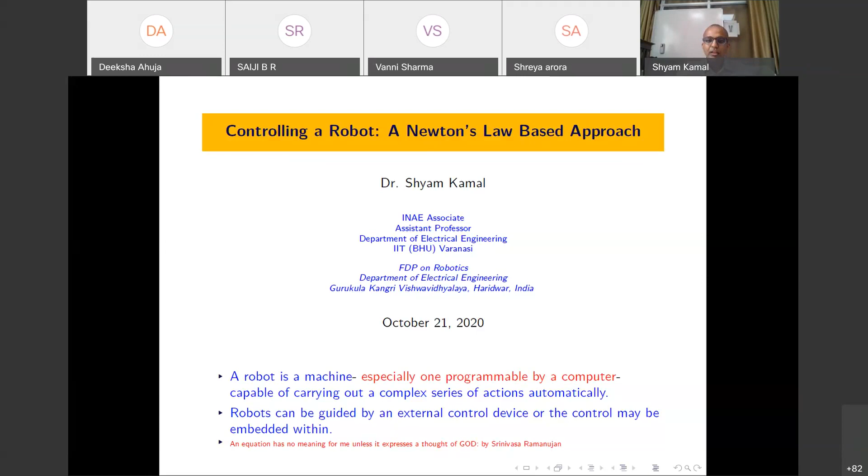So within these 2 months, I tried to understand the control system again from the fundamental point of view, and I found that it is possible to teach control system using Newton's law. So the same kind of thing I am going to share today. So let us start the discussion. Basically, the purpose of today's discussion is to introduce the audience to the latest effective and easily applicable method of control of robotic systems. Because, as I told you, using Newton's law I taught them nonlinear control techniques also. So using Newton's law, you are able to understand linear, simple control systems as well as the highest form of control system.

And heavy uncertainty condition means that, suppose your vehicle is moving in the open ground and some storm is going to hit it, we do not know the magnitude of the air which is going to disturb our system. And whenever this kind of unexpected thing happens, that is termed uncertainty. And there are several forms of uncertainty. One is called external uncertainty; another uncertainty arises due to measurement.

So whenever we are making some system, we assume that we know each and every parameter. Suppose you want to apply Newton's law, then we assume that the information of mass is available. But you are all aware that I cannot measure the mass exactly. There always exists some kind of error. And the control system should be beautiful enough that even if I have approximate information, I am able to fulfill the task precisely. So that is the aim of control system.

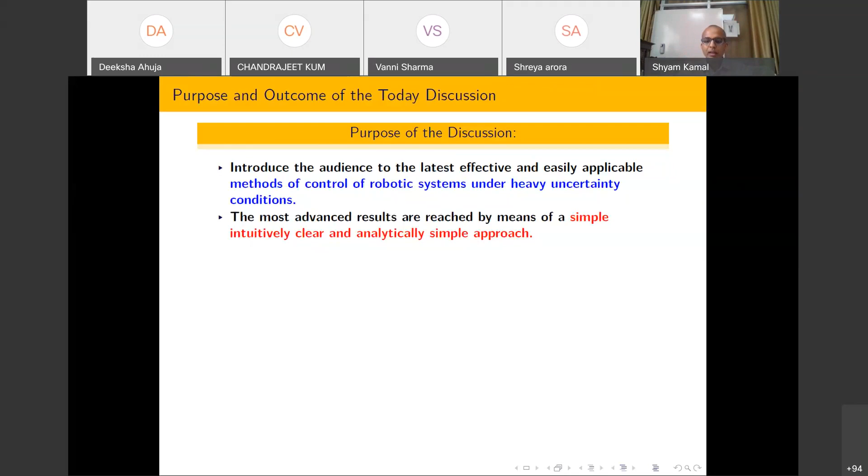So this is the story about the system. It means that any robotic system is nothing but some kind of mathematical function which will take input and give out some kind of output. And after that, after completion of this discussion, we are at the end of the lecture. The audience will be able to understand the physical interpretation of a term called PID. I will explain this term in the next part of the lecture. For the time being, PID means P for proportional, I for integral, and D for derivative.

Again, come to Newtonian calculus. In calculus we have two operators: one is the differential operator and one is the integral operator. And obviously we know the meaning of proportional. So basically using these three operators, Newton tried to capture some kind of things, and we are going to see what Newton was trying to capture using these three operators. And after that, if you learn this lecture carefully, you will be able to design control systems for the following class of systems: electrical motor design, because the motor is an integral part of any robot. Most robots are based on the electrical motor. So you have to understand how to control the motor.

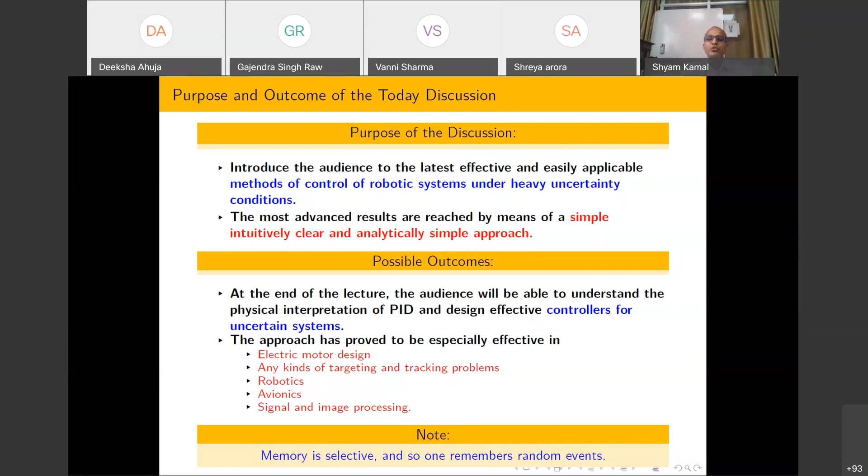So let us start the lecture. And I have already told you that one of the integral parts of this lecture is Newton's law. So first I am going to again review Newton's law. I hope that everyone is already well aware what is the meaning of Newton's law.

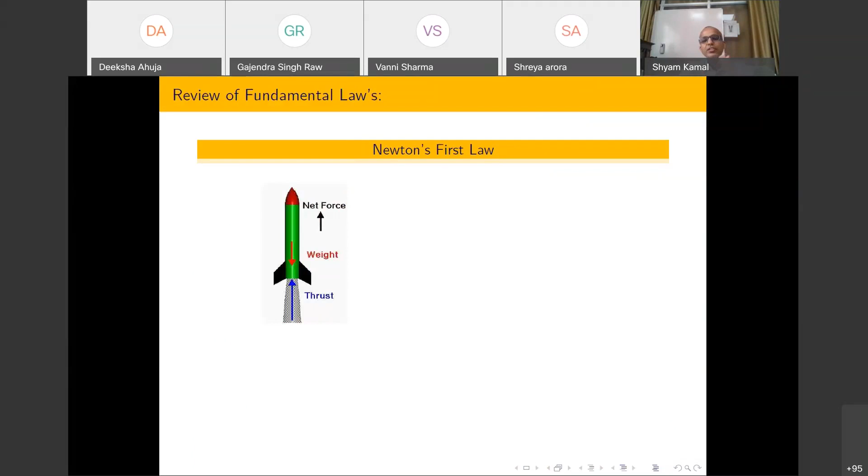So in order to explain Newton's law, I have just taken one system, and that is from aerospace. So this is a rocket, and you all are already well aware of how basically a rocket is working. So before going to the working principle of the rocket, first try to understand the statement of Newton's first law.

So what Newton has suggested is that every object persists in its state of rest or uniform motion in a straight line unless it is compelled to change that state by forces impressed on it. It means that if external force equals 0, if some system is at rest, then it remains at rest. If it is moving with some constant velocity, it will keep moving with constant velocity.

So you can see that I have first developed this kind of rocket, and after that I am going to see the situation before firing. Actually, whenever we are making a rocket, we are putting some kind of fuel inside the rocket. Firing means somehow we are going to burn the fuel. So before firing, what happens? This object is at rest and air speed equals 0.

Now, when we fire the engine, it means that somehow I am burning the fuel. So what happens is that when the magnitude of fuel decreases, some kind of thrust is going to increase. So that thrust is basically created due to the burning of the fuel.

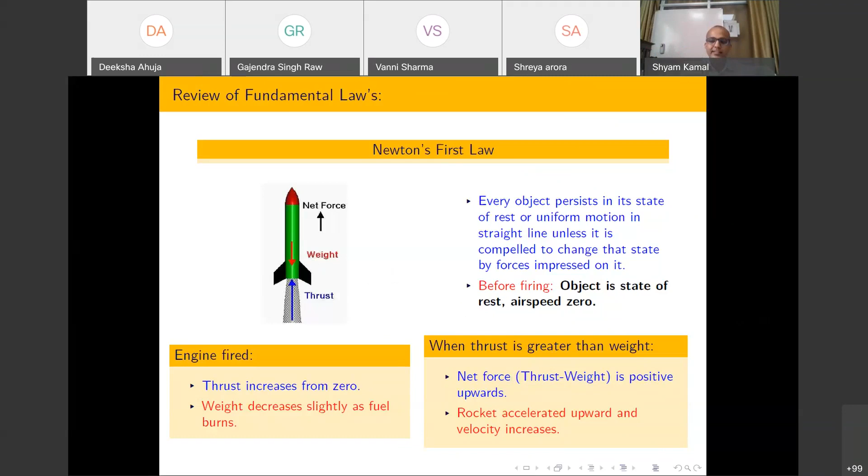And before proposing the second law, what he has observed is that whenever some force is going to act on the system, the position is going to change, and that rate of change of position he defined as velocity, and rate of change of velocity he defined as acceleration. So that is the meaning of acceleration. You all are well aware.

So now let us try to see the second law, and he defined the second law as: force is exactly equal to the rate of change of momentum. It means change of momentum with change of time.

And during school time we are reading this definition, but whenever we go to a higher class, at that time we are talking about instantaneous rate of change basically, because we know the concept of limit and these kinds of things. So for the time being, you can just assume that force equals change of momentum with change of time.

I found that most of the time whenever students come to the university, and if you ask them what is Newton's second law, they say F equals ma. That is wrong. That is not correct. That is just one special case of this particular definition. And let us try to see that.

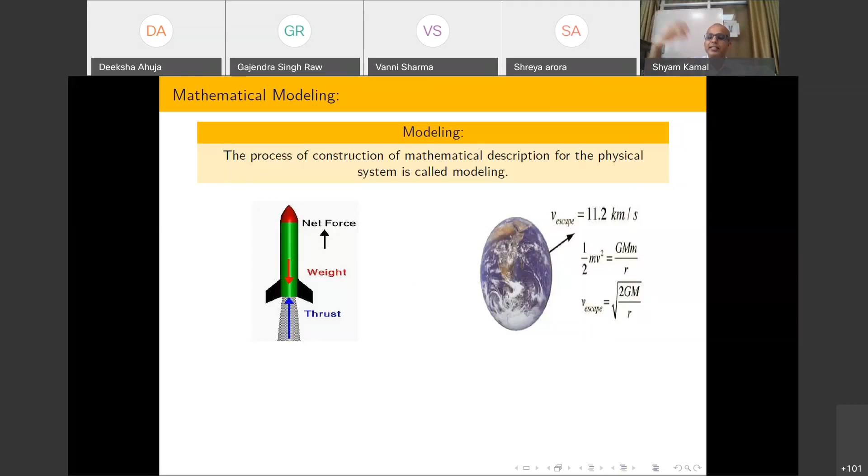And I am going to take help of this during the mathematical representation of this particular rocket. So you can see that now I have no physical rocket, but I want to do a study about the rocket, so mathematics is going to help us, and basically calculus is enough most of the time.

So what I am telling, h(t) is height. I am assuming this rocket is initially moving in a straight line, so only change occurs in this direction, that is the y direction, and I am assuming that is h(t). And rate of change of position, so somehow position is changing, I am assuming that just this height is going to change, so rate of change of height equals velocity.

After that I have to use Newton's second law, that rate of change of momentum. So how to define momentum? At a particular time, momentum is mass multiplied by velocity, and their rate of change is d by dt. Whenever I write this symbol, its meaning is d by dt. So in short, people write dh by dt equal to h dot, that is one convention to write.

Now you can see that rate of change of momentum equals force, and only one force is acting on this system, and that is gravity. So I am assuming that initially when this rocket starts, the rate of change of momentum is exactly equal to whatever force acts on this system.

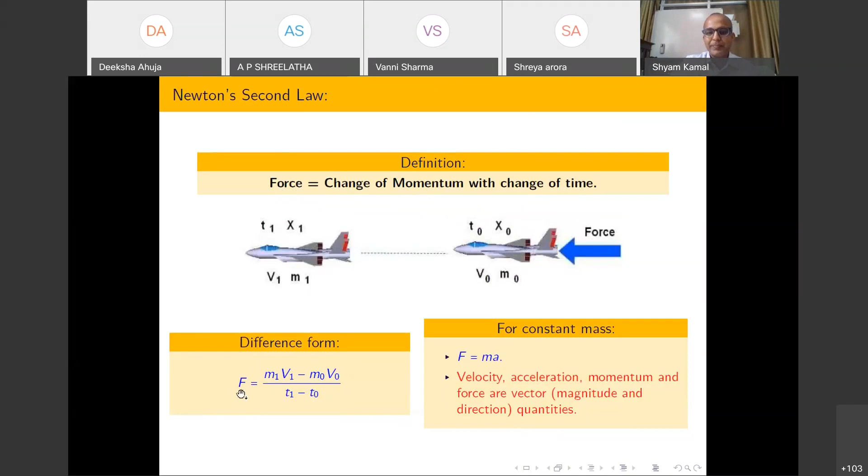That I understood, sir, that I understood. Okay, so if you have no confusion, then I will go to the next part of this lecture.

So now here you can see I have done one modification. What kind of modification have I done? I have replaced this velocity v by some kind of escape velocity. And why are we doing that? Because somehow I want to make some kind of rocket such that it will escape from the atmosphere of Earth.

And I have defined m dot, meaning rate of change of mass of this rocket, because most of the time if you see the rocket, a lot of its mass is just fuel. So we are assuming that whatever rate of change of mass comes into picture, that is just due to burning of fuel, and that is the control input for us.

So here, how basically do we control the rocket? We are burning the fuel, and that fuel creates some kind of thrust, and after that basically we are moving from one point to another point.

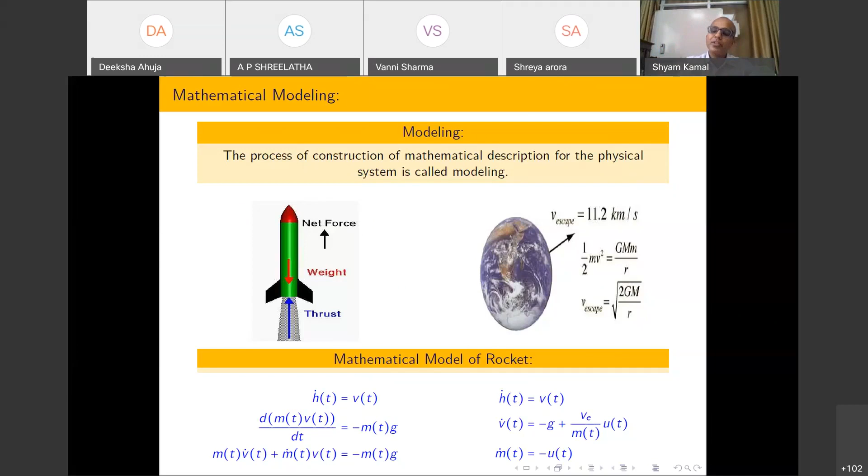Okay, so let's leave that. Now let us come to the second part of robotics, that is underwater vehicles. This is also one of the very important classes of robots.

When I joined here, a student came with this particular setup. In IIT BHU, they have this kind of setup. Now they want to control, or move this underwater vehicle inside the Ganga. Their main motive was to analyze the pollution, so they put some kind of sensor which can measure the pollution level of the Ganga, and they had to move this underwater vehicle from one point to another with some constant velocity. That was their aim.

But what happens is that they are unable to move with constant velocity, because the river is always flowing and its velocity of flow is not uniform. If you just record the velocity of flow within 1 to 2 hours, you are able to see the variation. So it is very difficult to move this underwater vehicle with constant velocity from one point to another point.

Now I am going to tell you another story. In a previous class, I talked about mathematical modeling. What basically mathematical modeling is doing: I have some kind of input, I have a certain kind of output, and they are defining some kind of virtual system in between using mathematics, such that if I apply input, I will get output. I have already told you that this virtual system is nothing but some kind of function—all machines should be some kind of function.

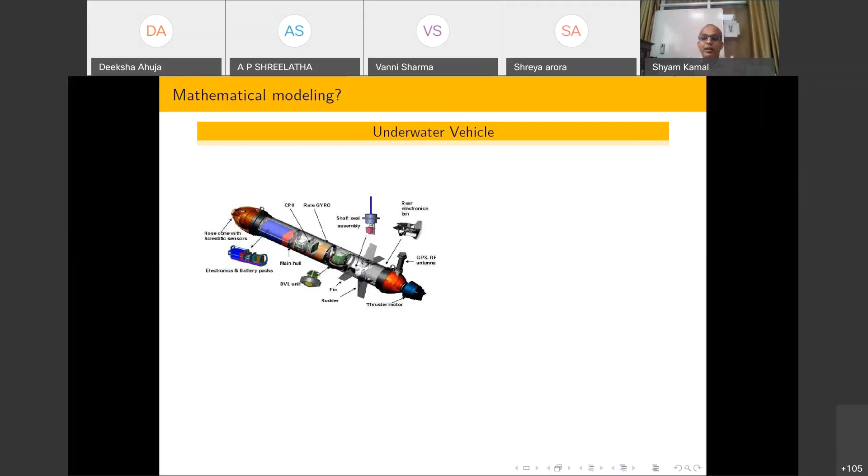It might be possible, if we are more curious, that I want some kind of velocity that is changing with respect to time, that is called time varying velocity. So based on that aim, you have to do the modeling. So you have to forget everything, and just now you have to control the motion. And how to control the motion? Again, Newton's law comes into the picture, and you have to just apply the second law, F equal to ma.

So here, for simplicity, I am assuming the mass of this underwater vehicle is unity, but you can scale it out. You can take any value of mass, that doesn't matter. And you multiply mass and rate of change; v dot is dv by dt, that is acceleration. So this is just a symbol used in engineering literature, control literature particularly. So whenever I am writing v dot, I am talking about the rate of change of velocity with respect to time.

So mass multiplied by rate of change of velocity. Now F, this is ma. Because I am assuming that the mass of this underwater vehicle is fixed, due to that reason I am going to use F equal to ma. Otherwise I have to go via the rate of change of momentum. So what I am going to do here is fix mass equal to 1, just for simplification. So I have m v dot, and this is u, and I have put one dash here.

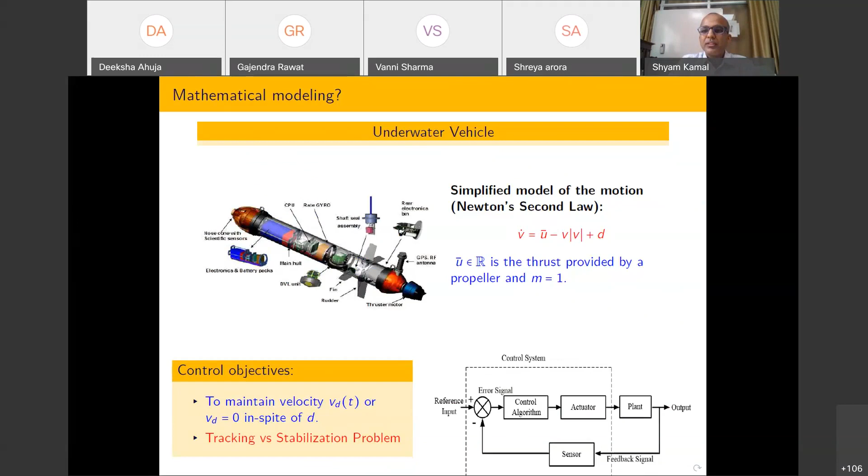Before, hello. Hello. Okay. Now my voice is clear. Yes, sir. Okay. So now I think that I am audible. Sir, you are audible. But actually our host is telling I am audible. So it might be possible. Please check your connection. Sir, you are properly audible. Audible, sir. Oh, okay. Okay.

So please come to the next part of this lecture. Here you can see that I have talked about two problems: I have to stop some vehicle, or I have to move with a certain speed. Both problems are not different; they are equivalent, provided we can assume something. And this slide conveys the same thing. Suppose you have to track this velocity Vd. This is my reference velocity, and whatever velocity I have now is called v. I am moving the underwater vehicle, some velocity is created, but I have to track Vd.

Suppose this Vd is some kind of sinusoid, meaning I have to move that underwater vehicle along some sinusoidal path. You can create a circular path, whatever path you want. But there is some limitation. What kind of limitation? Whatever path or reference you select should be differentiable. Otherwise, I cannot apply Newton's law, because here v is changing with respect to time, and due to that reason the error is also changing with respect to time.

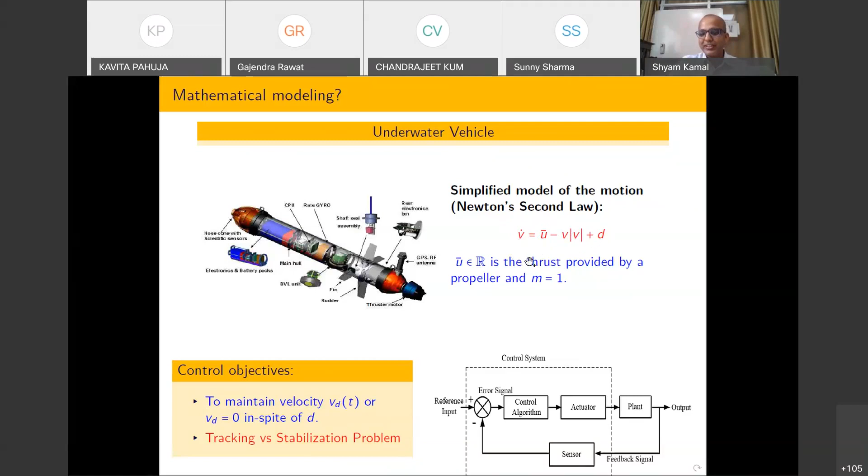So why are we doing mathematical modeling? Now you are able to understand. Using the mathematical model, I can talk about the control action. So basically, whenever v dot comes into picture, I can automatically substitute the right hand side, and after that I have vd dot. Now what is our aim? Our aim here is to make error equal to 0. If error equals 0, then v equals vd, and that is our aim.

Whatever velocity is coming from the underwater vehicle should be exactly equal to our reference velocity. That is our aim. So now our objective is changed. I just have to make the error between the reference signal and output equal to 0. For that reason, I have to select the thrust to the underwater vehicle, or the input current to the motor in case of the robot. So in this specific problem of the underwater vehicle, I have to design this thrust.

Now see here that this u bar I have defined as ue, a function of error, and after that I am going to substitute the terms v mod v and vd dot. Whenever you are designing some kind of computer program, each term of the program should be known to you. And I am assuming that the reference velocity, whether I move on a circular path or a sinusoidal path, and its derivative are known to me.

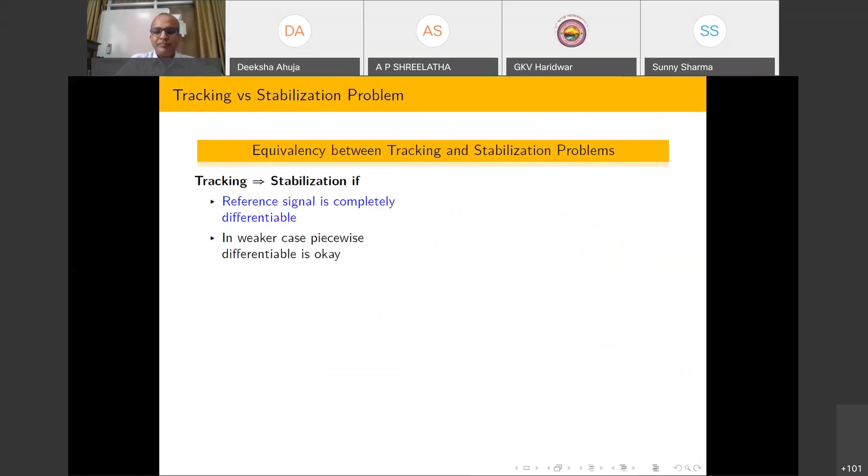One minute, please. No problem, sir. I'm connecting again. I'm very sorry about the internet connection. No problem, sir. We know that connectivity issues are there in India. Okay, so I hope the slides are now visible. Yes, sir, it's visible. So do not worry. I hope that you are able to understand up to this point.

What we are saying is that I have to track Vd. Sir, there is a small doubt. These equations are understood. But when it comes to practical applications of these equations, we use MATLAB. So can you tell us how we can work on this equation in MATLAB?

Okay, ma'am, could you please ask this question at the end, then I will tell you in detail, because I have a lot of slides to complete. Sure, sir, I'll wait. How much time do I have? Could you please tell me? 20 minutes. Hello.

Plus v mod v. So actually what happens, I am going to tell you one thing.

Know that your class teacher is very sluggish. So what you are going to do is take some kind of risk: okay, if I fail then I will read, otherwise I will not read. But some students are very practical. They know that if they do not read, they are not going to pass this course. It means they start reading from the beginning onward. They take that kind of action because they know if they do not read, it is possible they will fail.

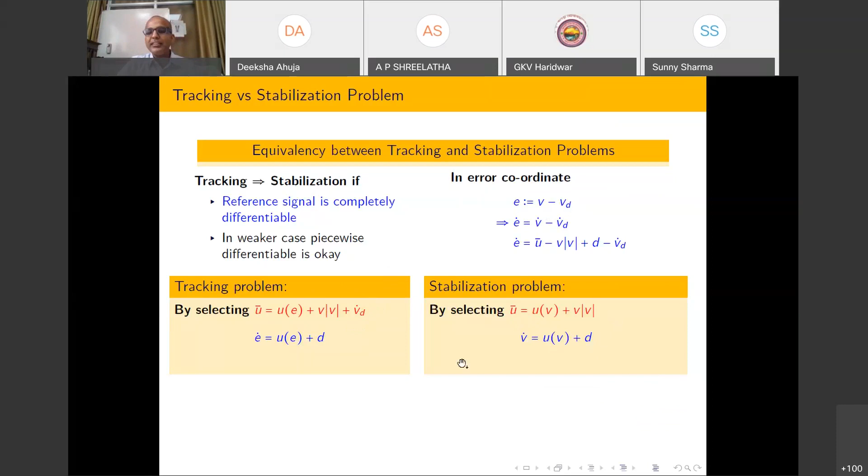So at that time you can see the difference: since I have to make VD 0, automatically this term will go out, and after that I have this kind of equation. This equation and this equation are exactly the same, and due to that reason we say that a stabilization problem is exactly equal to the tracking problem. You can just replace E by V. But in this whole analysis, what we have found is that VD should be differentiable. If that is not differentiable, then I cannot go ahead.

One more important thing I forgot to tell you in today's lecture: whenever we talk about Newton's law, that is very restrictive, because we assume that velocity is defined. How do we define velocity? Dx by dt. If position is not continuous, then I cannot define the velocity. If velocity is not continuous, then I cannot define the acceleration. So only when position and velocity are well defined can I apply Newton's law.

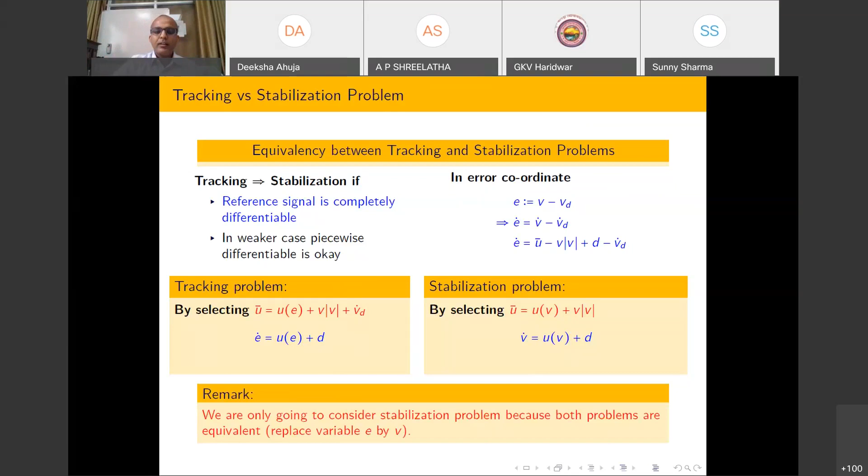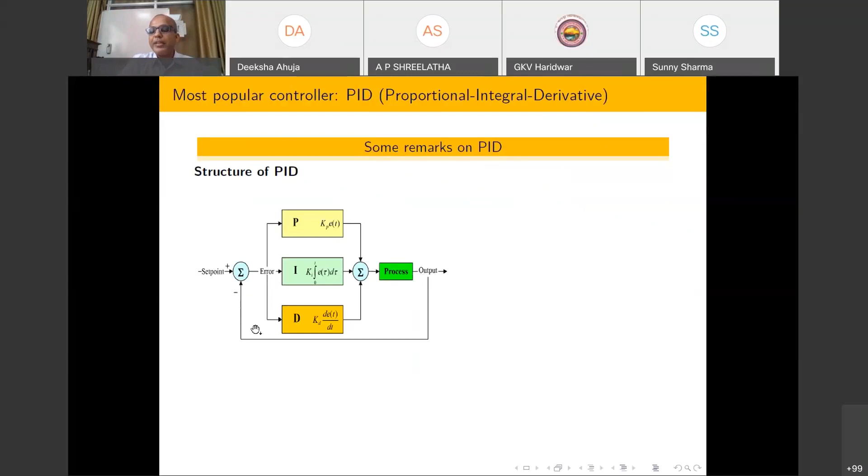Now let us come to the design problem, and this slide will tell you the story of how to design the control action. Again, the story is motivated by Newton's law. I have a process, I have an output, and I have a set point, meaning a reference point, and this output should track the set point exactly. Whenever a mismatch comes into the picture, I have to design some kind of feedback. The feed forward I have already designed; now I have to design the feedback.

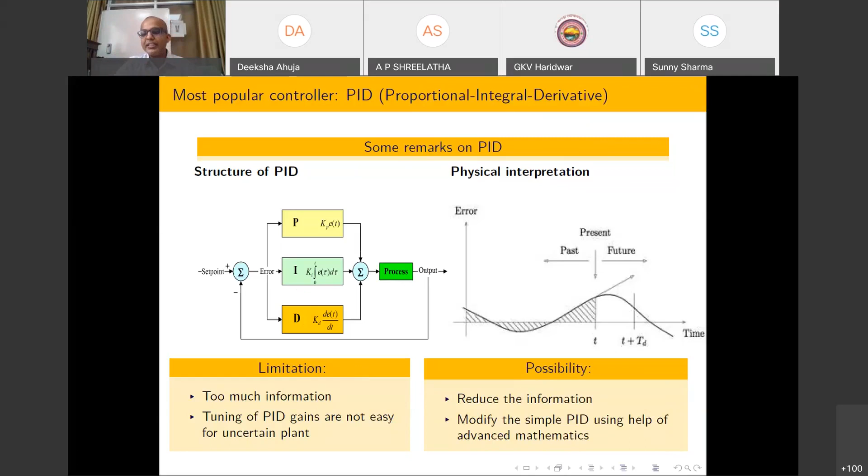Let us try to analyze case to case. I have told you that present information is more reliable. Due to that reason, I am going to start by seeing that if I have just present information, then how to design the control action. So I am assuming initially that there is no disturbance, and my process is captured exactly, just for simplicity. After that, I can involve this.

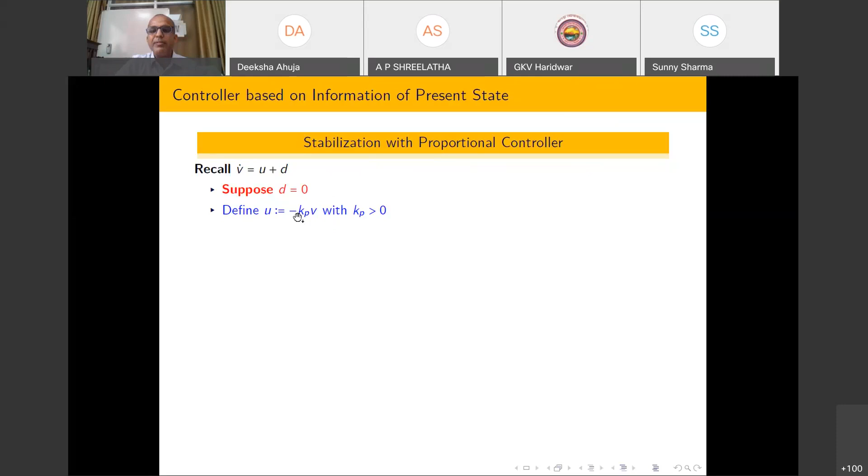In this slide, you can see that I have selected U, that is minus Kp into V. I am just talking about a stabilization problem, meaning I have to stop the underwater vehicle. So in order to do a stopping, what I am going to do is create the error. So error is V minus Vd. Vd is 0 because I have to stop it. And after that, I have scaled it out, and here I put a negative sign. I will tell you the story about this negative sign in the subsequent slide.

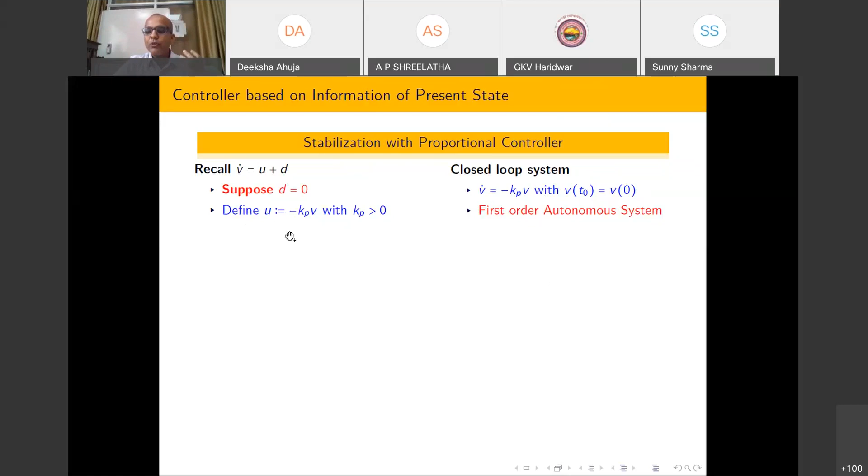So what happens if you substitute this control action here is whatever closed loop system results. Now this system is autonomous because no other involvement is required. Whenever an underwater vehicle moves inside the water, it can take its own decision. Due to that reason, the term autonomous robotics comes into picture. Semi-autonomous means I will also involve somewhere, using some kind of human-in-the-loop or similar. So this is an autonomous system after applying this control. We are telling that now our autonomous vehicle is intelligent enough to take the decision.

Now, in order to design this Kp, try to understand this slide. This slide is very, very important. If you understood this slide, then you are able to understand the next slide very easily. So in the start of this lecture, what I told you is that whatever system I am going to assume gives some kind of real number, and the output should be a unique real number.

So real number, how to represent a real number? If that is one dimension, from school onward we know that real numbers contain integers, non-integers, fractions, so I have represented that real number with this line. After that, I have two or three sets of values: either velocity equal to 0, velocity is positive, or velocity is negative. Suppose velocity equal to 0.

So if velocity equal to 0 initially, then try to substitute within this differential equation. So rate of change of velocity also equals 0. So again try to interpret like this. Now I am going to tell you another story. Since you have to control the velocity, now your coordinate frame is shifted to the velocity, so now you have to interpret velocity as a position.

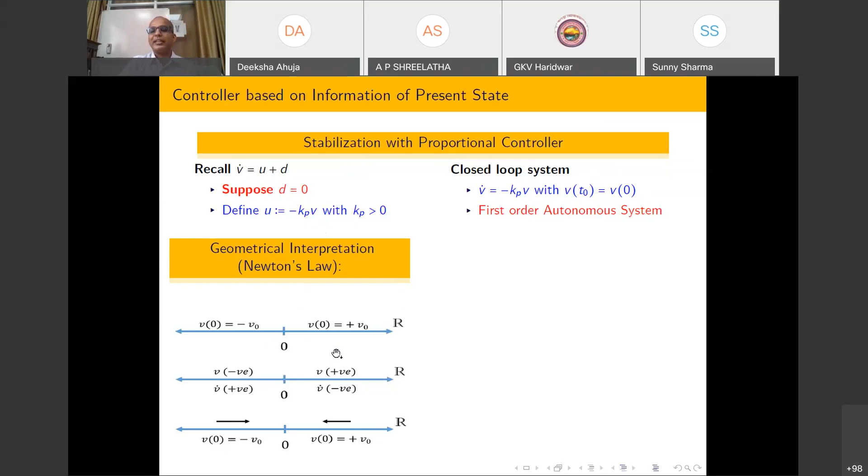And due to that reason, how to design proportional control? You can select any value of Kp that is greater than 0, and that will work for our purpose if there is no disturbance. Now, one more important thing: if Kp value is larger, then your rate of change is larger, so you quickly converge to 0, meaning you can quickly stop the underwater vehicle. Based on that, we basically design the Kp.

So I have defined this kind of term. From this slide, this terminology comes into picture. Idea of equilibrium point means that point. Here you can see that in this space, on the real line, I am assuming that this velocity just belongs to one real line, so I have represented it like one real line. I will tell you later if I have two dimensions, how to deal with that.

So if I start from here, I am going to stay here. That is the idea of equilibrium point. After that, all trajectories converge towards the equilibrium point if you start anywhere, because we have seen that rate of change always comes into picture if you are not at this equilibrium point. And due to that reason, finally, all trajectories converge towards the equilibrium point.

And the idea of asymptotic convergence means as you move towards the equilibrium point, the multiplication of Kp into V becomes very, very small. So if that is very, very small, then rate of change is small, and you have to wait a very, very large time to converge to the equilibrium point. Due to that reason, this kind of convergence is called asymptotic convergence.

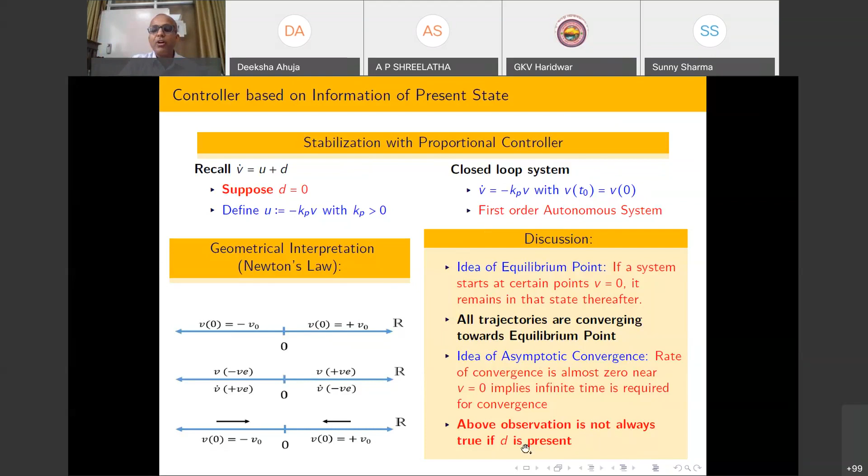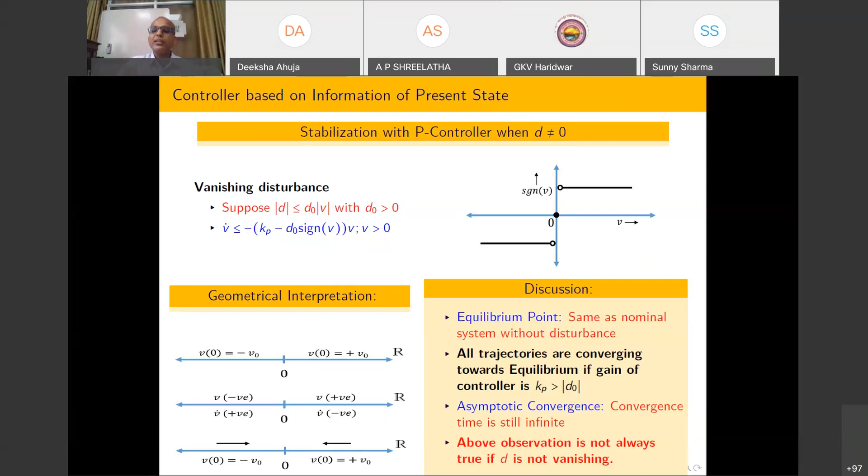Now the third situation, which is very important. What I assumed initially is that whatever disturbance exists will vanish at the equilibrium point. But that is not a true assumption. Sometimes I have a time varying disturbance that still persists even when we are at rest. Suppose I have an underwater vehicle, so even if the vehicle is in a stationary condition, the river is flowing, which means I cannot assume that the disturbance is proportional to the velocity. It may be some constant and unknown quantity.

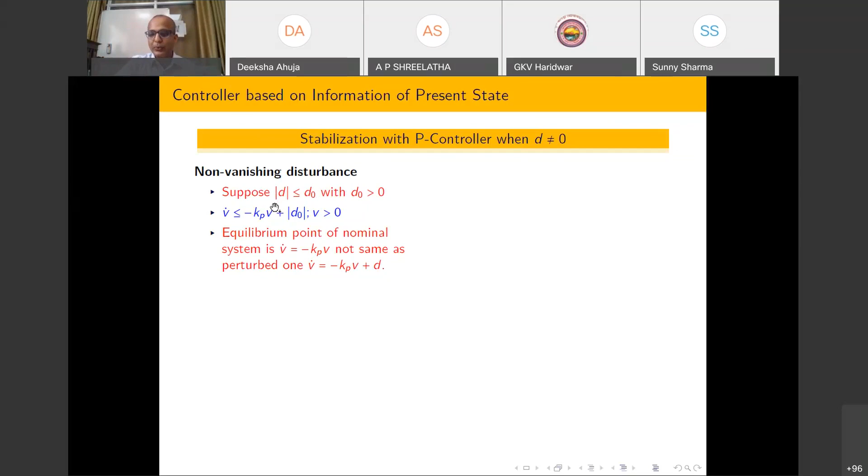So I am assuming that D is constant and unknown. If D is constant and unknown, let's see the situation from Newton's law. Now I have a closed loop system like this, and from this graph you already know that if the right hand side is negative and we are on the right half plane, I will converge. But here the disturbance may be positive or negative, sometimes supportive, sometimes not, and due to that I cannot guarantee convergence. So we say that whenever Kp times V dominates over D, we have converging behavior, but after some time this behavior is going to cease.

Why does it cease? Because after some time, V is decreasing, so even if Kp is larger, the value of Kp times V becomes smaller, and if the right hand side becomes positive, we will diverge like this. So I can only guarantee that in the presence of disturbance I am not exactly able to stop, I will oscillate, somewhere between minus D0 over Kp to D0 over Kp.

And due to that reason I cannot always rely on proportional action alone, because suppose you launch some satellite, a geostationary satellite, and some perturbation comes into the picture. You have to make sure that in any disturbance situation it should again converge to the equilibrium point, or equilibrium orbit. So finally we have to converge to this point, and if you apply control based only on present information, you are not able to do that.

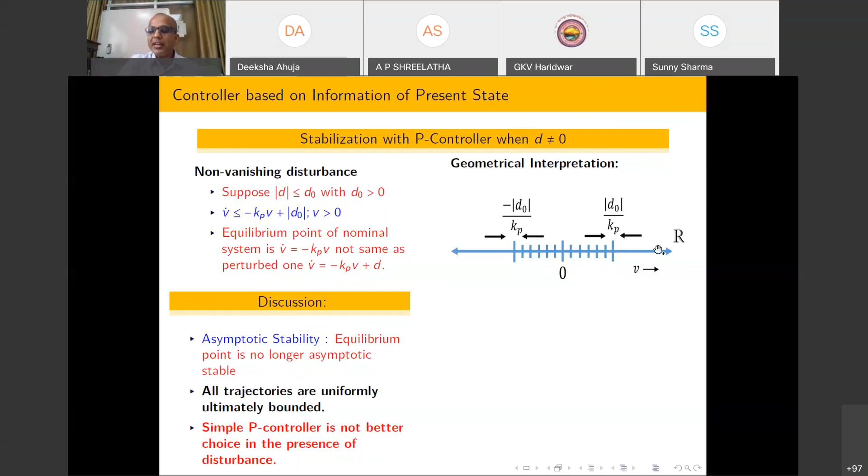And with what we have achieved here, it means that if you start anywhere in this blue region, you are going to stay there, but outside it you will converge here. Due to that reason this term comes into picture, called uniformly ultimately bounded.

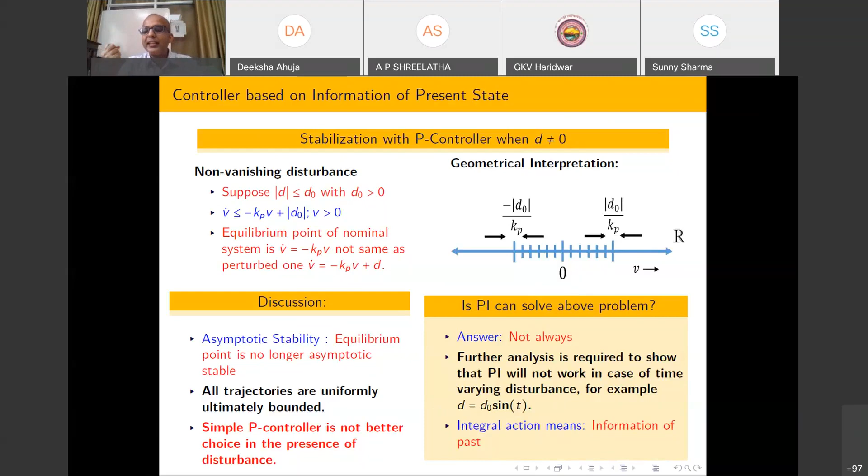So forget about the technical term, just try to understand the intuition. What we have observed is that if D0 is constant or some kind of time varying disturbance, then using only present information I cannot do anything. Due to that I have to involve more information, the information of the past. And due to that another control combination comes into picture, called proportional integral control action.

If you have proportional integral control action, the control is modified to Kp times V minus Ki times the integral from 0 to T of V tau d tau. This integral is responsible for collecting all the past, so I am saving all the past and applying this kind of operator.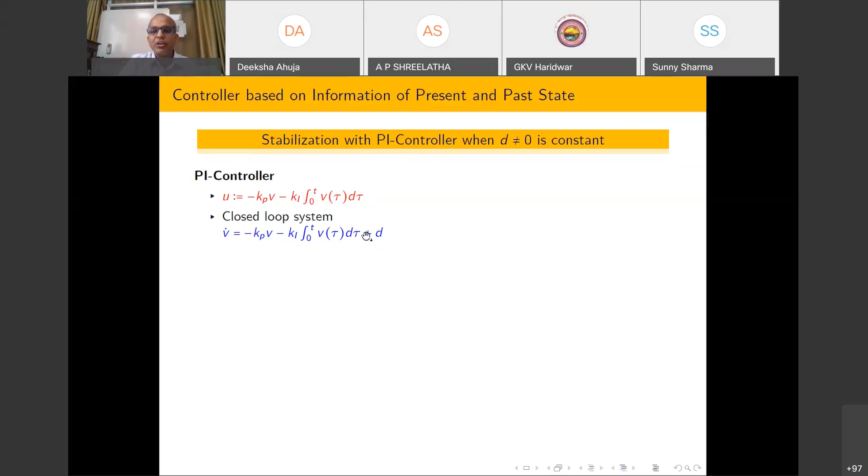If you apply this kind of control, your closed loop system now looks like this, and you can see that in this differential equation I also have an integral equation. So I cannot apply the same analogy I learned in the previous slide. Due to that reason I am going to define another variable z. If you define this z variable, you can see that adding the integral automatically brings in one more differential.

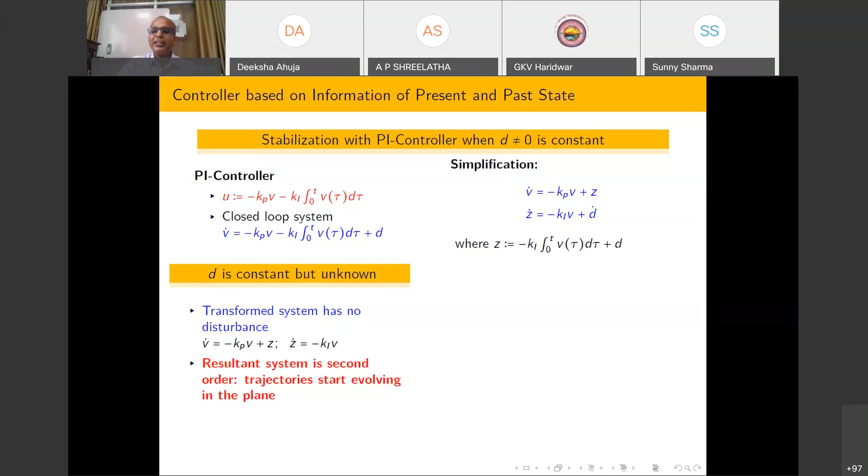So your first order system, V, I am assuming only first order, now after adding z this becomes a second order system. If a first order system is converted into second order, then I am no longer on the real line. The real line situation is simple, because you can only move in a diverging direction, converging direction, or stay there. But if you are in a space, a two-dimensional space, because now I have two coordinates V and Z, I am in some kind of two-dimensional plane.

So if you are here, I have infinitely many directions, so I cannot apply the same kind of analogy. I cannot apply Newton's law the same as in the first order case. So I have to think a little more. One more important point: if D is constant but unknown, then D dot is 0, and my system becomes free from the disturbance. But if D is time varying, then D dot also comes into the picture.

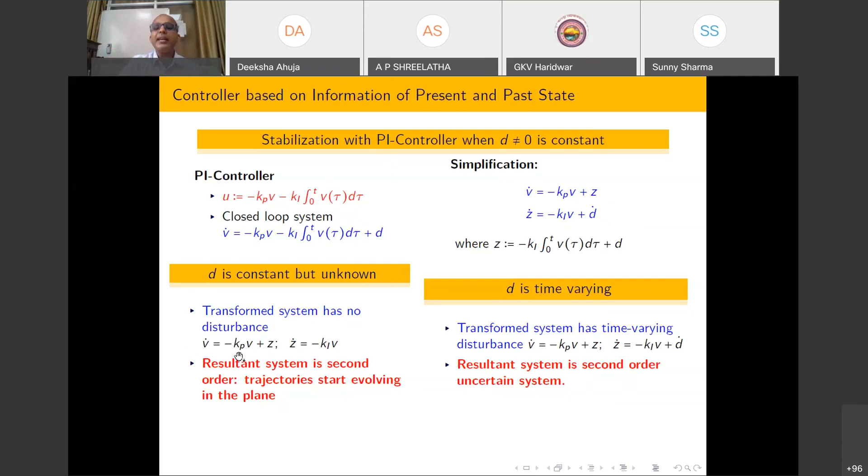So what we have observed is that if a constant disturbance acts on the system and I apply proportional and integral control, then my closed loop system is free from disturbance. So PI control is able to reject a constant disturbance, but it cannot reject a time varying disturbance. So first try to understand, if a constant disturbance of constant magnitude hits our system, how I can design Kp and Ki, because I have to design 2 gains. So I have to see a different strategy.

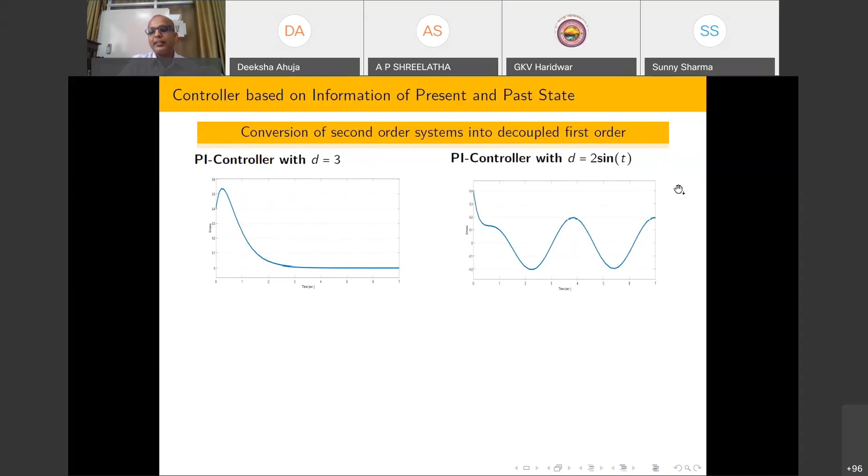So this is the MATLAB simulation. I will tell you at the end how one can generate the MATLAB program. With D equal to 3, a constant disturbance, you can see that after application of the PI controller, again V equals 0. But if it is a time varying disturbance, 2 sin t, then it is oscillating with the disturbance. So I cannot maintain V equal to 0. So the underwater vehicle is somehow oscillating.

Now try to see the geometrical interpretation if I have a 2-dimensional system. A 2-dimensional system means that I now have 2 different coordinates. Initially I have just this real line. Now I am going to add one real line in the vertical direction also. In this way I can create the 2-dimensional plane. And if you are here now, assuming Z is non-zero and V is non-zero, then you have infinitely many directions. So now I cannot talk the same way as the first slide. But I have one thing.

Some system looks complicated in some coordinate frame, but if you transform it into a simple coordinate frame, things become easy. I will give you a very simple example. Most of you travel by train. Suppose the train is moving on a circular path and you throw a ball. If you are sitting inside the train, it looks like the ball is moving in a straight line. But if you are sitting outside, you observe that the ball is moving on a circular path. So the ball remains the same, but if the location of the observer changes, something which looks complicated becomes simple.

So mathematicians suggest the same kind of thing: if you have a complicated situation, do not worry, try to apply some kind of transformation. And this is where the idea of the matrix comes into the picture. I hope that if you are a teacher from a 10+2 school, you are teaching matrices. What a matrix does is simplify a complicated coordinate frame into a simple coordinate frame. That is the role of matrices in the analysis or design of systems. So the matrix is a very good tool to design systems.

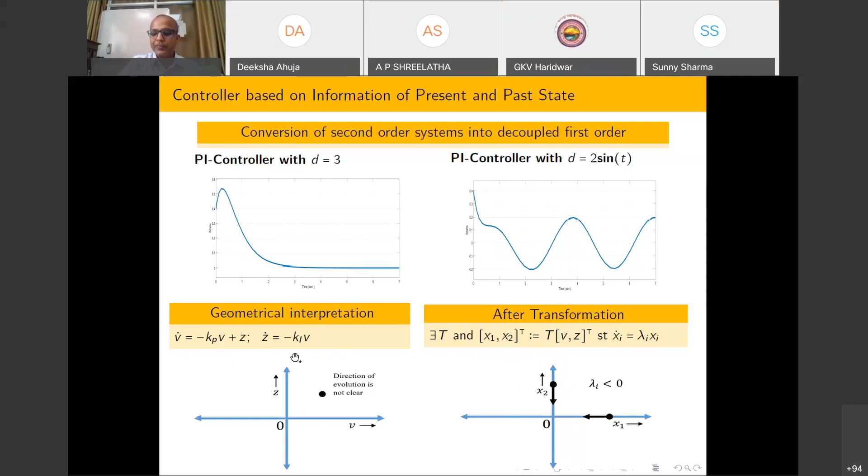Now I am assuming that whatever transformation I use here, all entries of this transformation are a constant matrix. It is possible to show that if I tune Kp and Ki, then this system is decoupled into these two systems. And if these systems are decoupled, then again I can apply Newton's law in this direction and this direction, same as the first slide, and I can design Kp and Ki. In the next slide, some idea of matrices is involved. If you are not aware of matrices, please forgive me, because I am assuming that you know what an eigenvalue is. Please just check what an eigenvalue is. I hope you are all well aware of eigenvalues.

It is possible to show that by fixing Kp and Ki, if you calculate the determinant of lambda I minus A, that gives you a polynomial, and the roots of the polynomial are lambda 1 and lambda 2. By choosing Kp and Ki, I can tune lambda 1 and lambda 2. And if lambda 1 and lambda 2 are negative, then it is possible to show that this system is decoupled into two. That means this coupled system is decoupled like this.

Now I can again use the same kind of analysis. So I can tune the gain of present information and past information, meaning PI control, using this kind of methodology. So that is pretty easy. You can select Kp and Ki, because these two gains are in our hands, so I can select Kp and Ki and try to make lambda, lambda 1 and lambda 2. If lambda 1 is higher, then the rate of convergence is higher, so try to select lambda 1 that is more negative. So that is the idea.

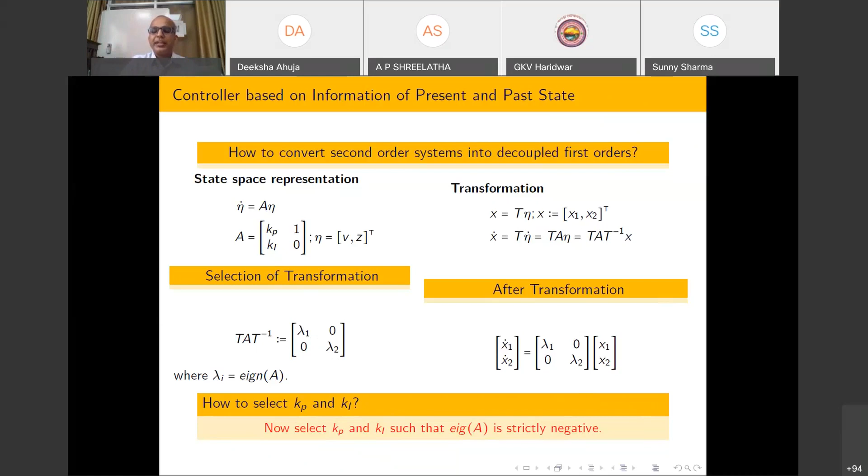So please forget about this slide, there is no need to explain this slide. Now let us come to this slide. In this slide, what I am telling is that suppose I also have future information, then what kind of things come into the picture. With future information, my control is Kp into V and Kd into V dot. And if you rearrange it, then this kind of action comes in. So if you apply future information, your action remains proportional, but you just scale down the disturbance, and all tuning remains like Newton's law. So due to that reason, I am going to skip this slide.

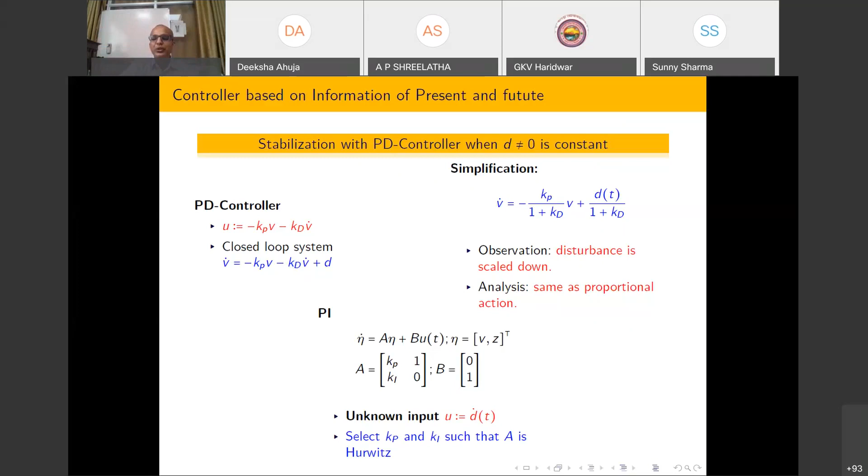So what we have seen is that if I have some system with no disturbance, then you can apply proportional control. If you have some kind of constant disturbance, then you cannot apply proportional control. You have to shift to a PI controller. But what is the difficulty of the PI controller? It is only able to reject constant disturbance, but not time varying disturbance. And due to that reason, again you have to shift to another control action, and this control action is called high gain feedback. So what is the main motive of this slide?

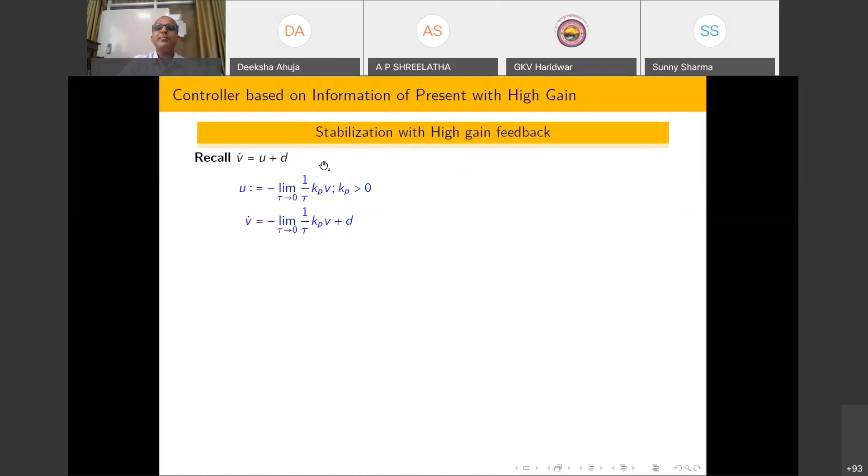They are telling that if the actuator is strong enough to sustain any kind of control action, then using proportional information I can reject anything. And we have such kinds of actuators, that is pneumatic or hydraulic actuators. You might have seen that no train is stopped using an electrical actuator; it is stopped using a pneumatic actuator. Why? They can apply very, very huge force. And how is that force created? Kp into V and 1 by tau, tau tending towards 0. So this value becomes very large, and I have just present information, but I can apply a very large control action using a pneumatic or hydraulic actuator.

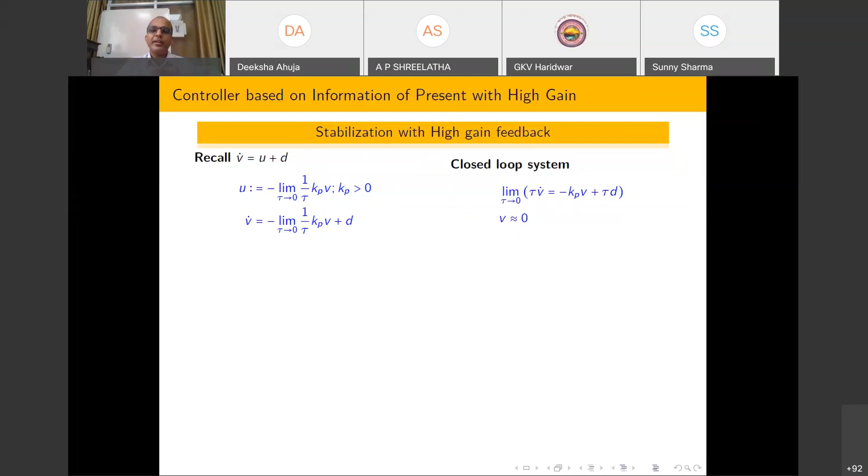And in this situation, if you multiply with tau, then finally, if tau tends towards 0, you are able to get V equal to 0. From this equation, you can see that the first term is 0, tau into D is 0, and V equals 0. So if your actuator will allow any class of control, then there is no need to shift to integral action or derivative action. Just proportional action is enough to control the plant.

But whatever robotic system we are developing is driven by an electrical motor, and an electrical motor always has limitations. Due to that reason, I have to relook at the control action, because I cannot apply this kind of control action. But what is the beauty here? If I am able to apply any control action, then I can reject any class of disturbance: constant disturbance, vanishing disturbance, non-vanishing disturbance. Still I can reject it. So the next question is, is it possible to design a control strategy where my gain becomes bounded, meaning I can apply bounded control but reject a large class of disturbance? And due to that reason, the next strategy comes into the picture.

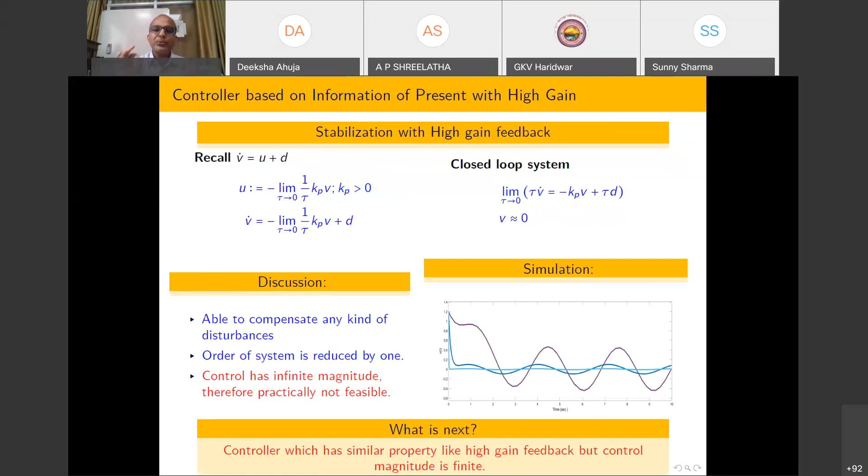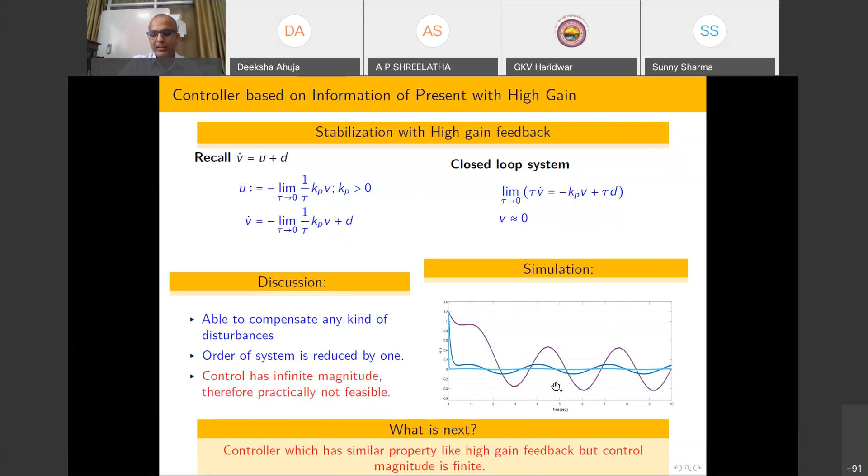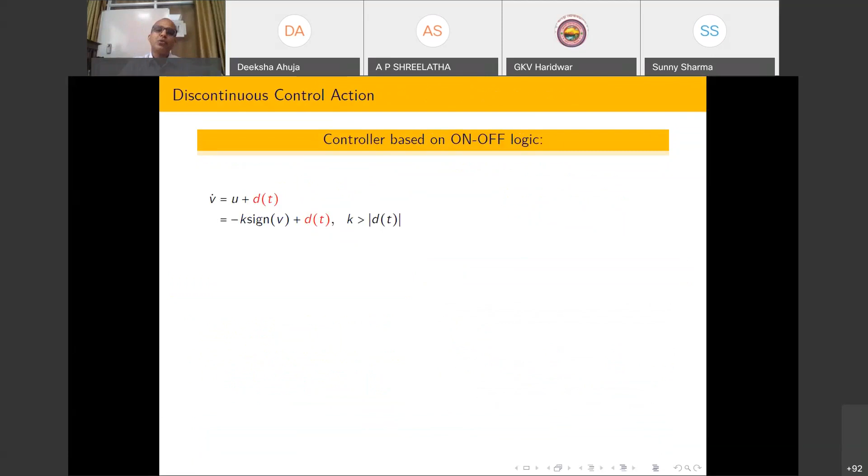Here in this MATLAB simulation, I just want to show you that if I am decreasing tau, then finally we are able to arrive at the equilibrium point. My disturbance is sinusoidal. Another control strategy is called on-off control. Whenever you purchase a robot for your child, most of the time it is an on-off robot. So how the on-off principle works, using Newton's law, I am going to explain today. So now you can apply some kind of on-off control, U equal to minus K signum V.

And what is the beauty of on-off control? It does not require past information or future information. It always works on the present information. So it is also quicker, very fast.

So here, because I am assuming V belongs to R, I have to control in just one dimension. If I have two dimensions, then using a transformation I can again decouple the system into one dimension. Even if I have three dimensions, by defining some kind of transformation I will again come to one dimension. So I can apply one-dimensional theory everywhere. That is the main motive.

Now here, try to see the situation. I have designed the control action, that is minus K signum V. Now if V is positive, then what happens? Minus K signum V, because signum V just gives you the sign. So here it is positive, so minus K plus dt, and I am assuming K is greater than the disturbance. So somehow you have to tune your controller.

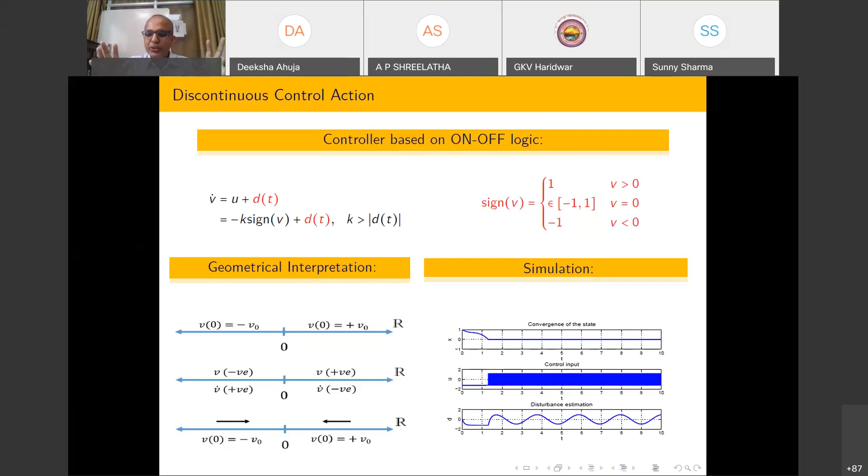So this is the story of the finite time controller. Now let us try to see that. Up to now what we have seen is that we have different classes of robot. One robot is for aerospace purpose. Another robot is for underwater purpose. A third kind of robot is moving on the ground, and most of the time that is controlled by a DC motor.

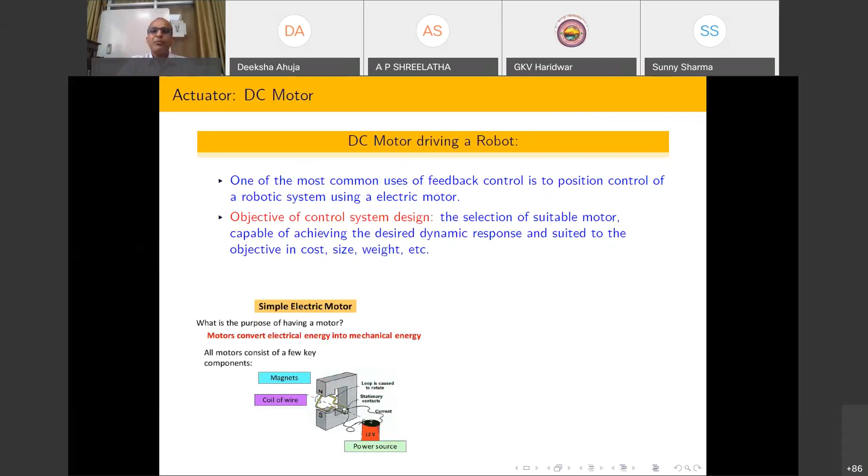And here we have to design control for the DC motor, because I have told you that a DC motor just acts like some kind of actuator. So if I tell the DC motor to apply more torque, then it will apply more torque. If I tell it to apply less torque, then it will apply less torque. So I am going to skip this slide. I am assuming that you all know about the DC motor.

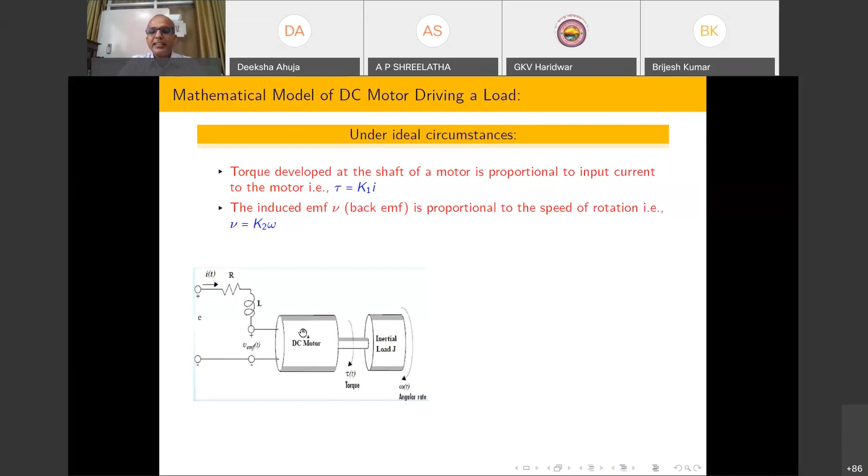So basically I have a DC motor, and this inertial load means I am assuming some robotic system here, or you can take this hand as a robot manipulator, and suppose I have to rotate this hand. So I have basically put a DC motor here, and that is going to rotate it. So that is the approximate block diagram, and I am going to skip this slide. Now I am going to the final conclusion.

So what we have seen is that I have reviewed the well-known PID controller. Most of the time I just talk about Newton's law, and based on Newton's law, I am able to explain almost everything. So what is the future prospect of this research? What I found is that NASA is trying to use control systems for students from 6th class onward, and that kind of concept is not available in India. And I know that from 6th class onward, it is possible to teach a student Newton's law.

So I try to further simplify this strategy such that I will write one book for school children based on Newton's law, so that they are able to build robots, simulate robots, and these kinds of things. That is my future aim of this research.